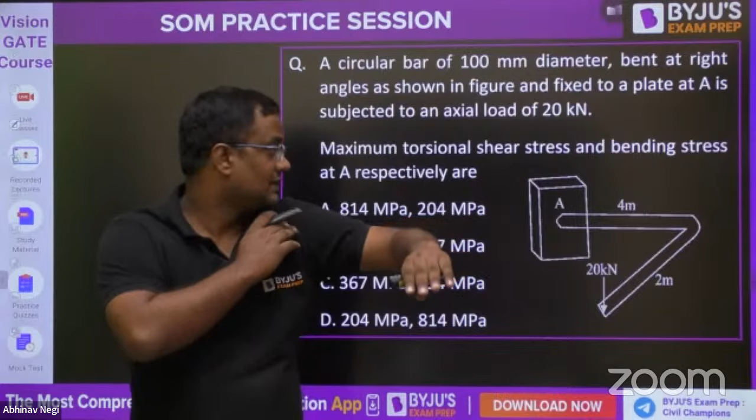Now here is the 20 kilonewton force. This is circular, and my hand is also circular. Here the 20 kilonewton force is coming. Then at my shoulder, this is also 90 degree. At my shoulder at the circumference there is point A. What will be at point A? The maximum shear stress and bending stress respectively.

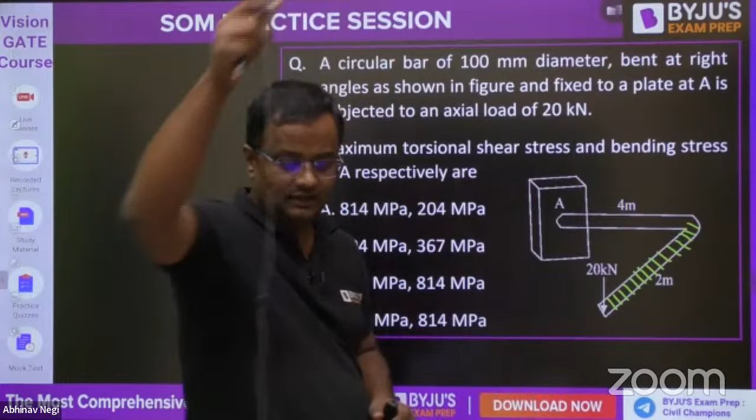Let me take this as green. Now let me make the free body diagram of this green. So this green is like this. And here in this green, 20 kilonewton forces are coming. Everything is in equilibrium. It is fixed here.

So equal and opposite reaction will be coming here. So here 20 kilonewton will come for balancing, so that summation Fy is equal to 0. This 20 is also providing moment, 20 into 2 equals 40. So that 40 opposite moment is also coming for balancing.

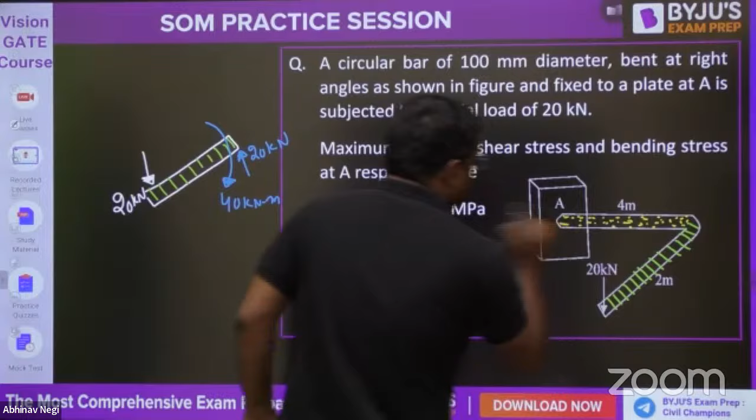Now let me make the free body diagram of this one, the yellow, dirty fellow. Internal forces are always equal in magnitude and opposite in direction.

So internal force here is upward, so here it will be downward, 20 kilonewton. And guys, if you see it in 3D, this moment which is like here, it will be about the longitudinal axis. About this axis, this moment is there, how much it is, 40 kilonewton meter.

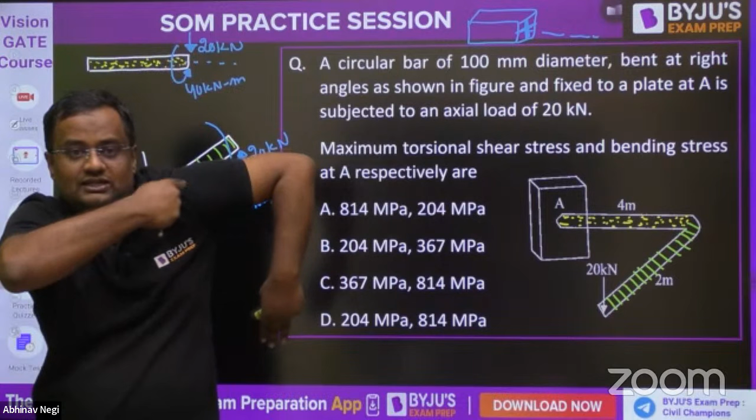Guys, bending moment and torque, both are moments. But suppose this is a beam, then about the transverse axis - these two axes passing from the section - the moment about these axes is the bending moment, and the moment about the longitudinal axis is torque. If somebody is applying load here and my hand is moving like this, that is a torque for this portion.

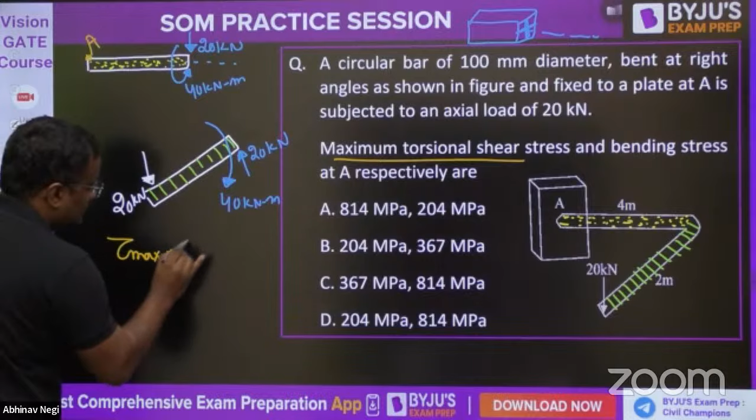And now here is somewhere point A. First of all, maximum shear stress is asked. So tau max for a solid circular section is 16T by pi d cube. This is T, T is 40 kilonewton meter. Diameter is also given, I'm not wasting time in calculation.

From here you will be getting 204 megapascal. Okay, this is providing torque.

Now bending stress is asked. So sigma is equal to M by I into y max. This load is providing moment here. What is the bending moment at point A? From 20 into, what is this distance, 4 meter, so 20 into 4, force into distance - this is not moment, this is torque, this is not torque, this is bending moment. So it is 80 kilonewton meter.

So it is 80 upon I, where I is pi by 64 d to the power 4, and y max is d by 2. I'm not wasting time in calculation, I have already done it. So that is the answer.

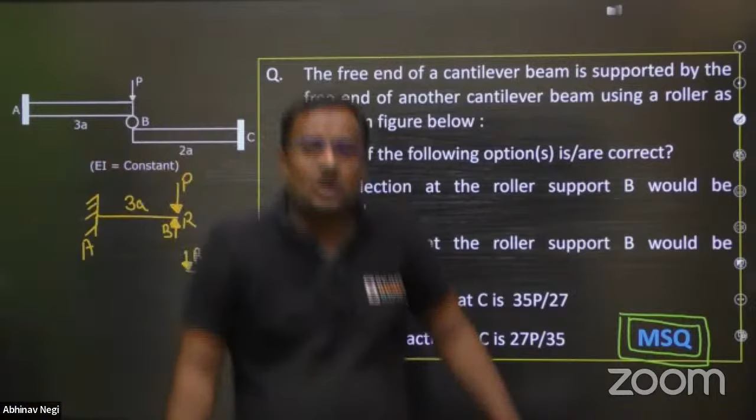This is A, this is B, this is C. If the reaction here is upward, then here the reaction will be downward. Guys, if I'm applying load downward on the floor, then the floor applies reaction upward to me, right? If I apply load downward, the reaction by the floor to me is upward, right?

So if that reaction goes down, guys, I don't know how many of you will be able to cope up with me or believe me. Whenever I want to draw a free body diagram, this I told in the paid class also.

The thing that I do is I assume that I am that part. So when I assume I am this part and somebody is applying a P load, from there an upward push will come to me like this. I assume that I am that part.

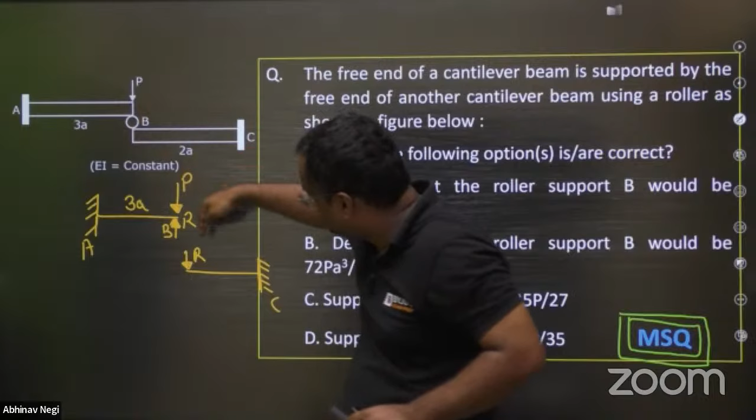Now suppose I am this other part, and from here load is coming. So if I am this, then due to this P load, whatever reaction comes, that comes to me downward like this. And they both are jointed.

They both are jointed. If this goes like this, the deflection of both hands are the same, right? Deflection of the right hand and the left hand both are same.

Not wasting time in calculations. R will be, from here, 27P by 35.

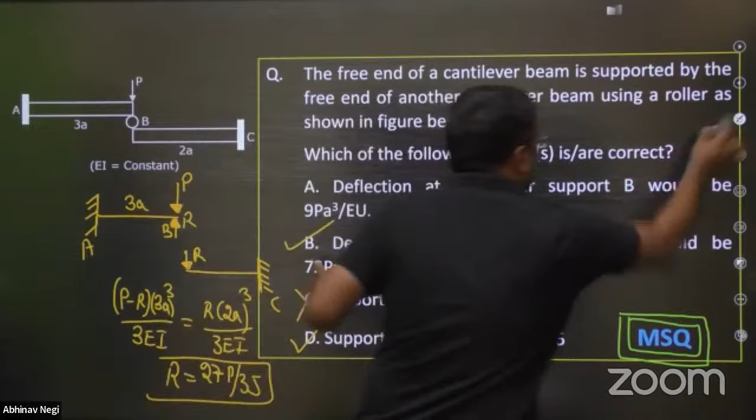27P by 35. So D is correct, that means C is wrong. D is correct, that means C is wrong. Understood?

Now moving further, what is asked? Deflection at the roller support B would be what? So either you put R here or R here, you will get the reaction. Deflection of roller support delta B.

Both are equal now, either you put here or here. Suppose I put R equal to 27P by 35, into 2A cube divided by 3EI. So from here, deflection at B is 72PA cube by 35EI, giving you the B answer.

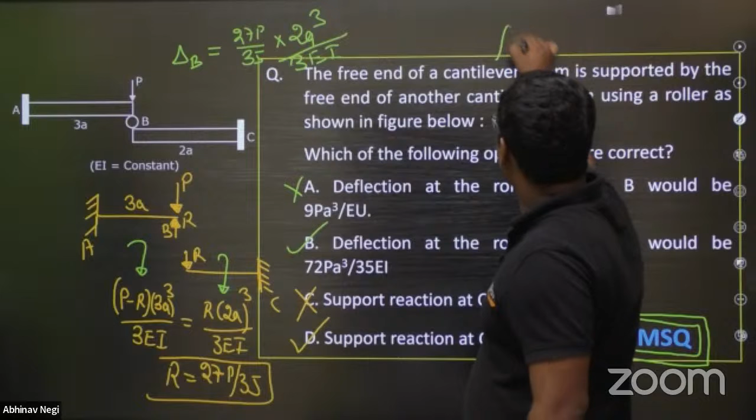So of course A will not be there. So the answer will be B comma D. Give me yes or no, have you understood this or not?

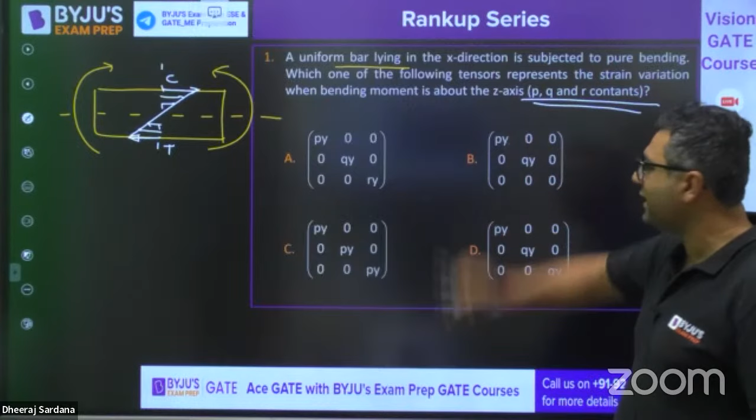So guys, this is a wonderful question, and this type of question we can expect in GATE examination for sure, for 2 marks. I feel everybody would be knowing this.

Vineet is saying the answer is C. Okay Vineet, what about others?

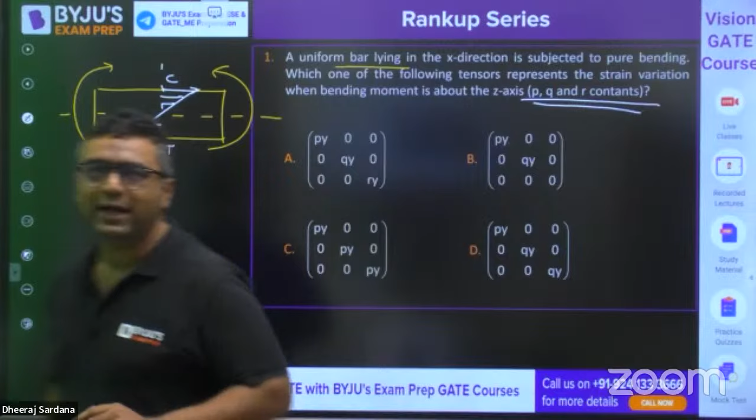Vineet has said the answer to be C, what about others? This is a wonderful question, I'm going to solve it right now in front of you. Raj is saying the answer to be B. Okay fine, so I'm going to start it now.

Everybody knows that in the derivation, we get the strain in the X direction as plus minus Y by R. This is the answer, and strain distribution is linear just like the stress distribution. Both are similar, because we are assuming Hooke's law to be valid. With those assumptions, stress and strain are directly proportional to Y to the power 1, so we get a linear expression for sure.

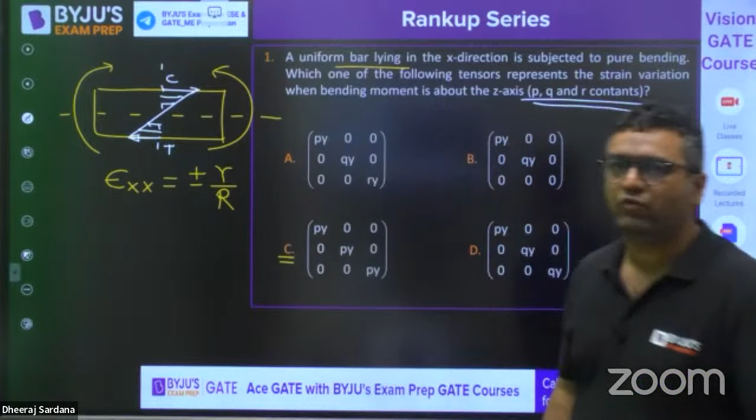So this is epsilon xx. You know that whenever finding the strain in the lateral direction, whether YY or ZZ, for uniaxial loading it is minus mu times epsilon xx. So this is Y by R, let us say this value is P into Y, where 1 by R can be assumed as P. So I will put here P into Y.

Obviously mu into P cannot be P, it will be something else, let us say Q, so we write it as Q into Y. Forget about plus minus right now, that will also be considered. But if you see this option, here all the strains are unequal, but YY and ZZ should be equal, so that's why A is wrong.

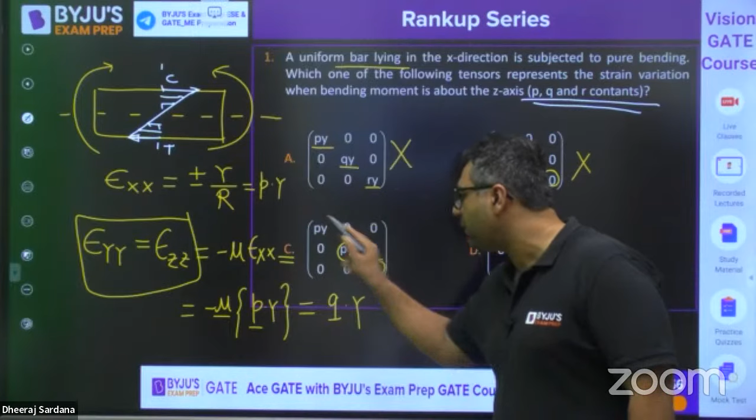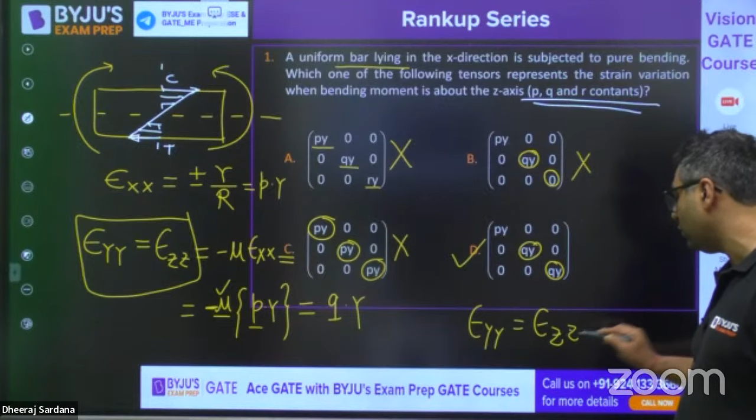In option B, YY and ZZ are not equal, so this is wrong. In another option, YY and ZZ are equal, but epsilon xx, epsilon YY, epsilon ZZ are all equal, which is not possible because mu is never 1, and also this minus sign is there, so this is also wrong. So only the option where this value and this value are equal is correct, because epsilon YY equals epsilon ZZ for uniaxial loading, and epsilon xx will be different from epsilon YY and epsilon ZZ.

So the answer will be D for this. I hope everybody understood this, this was a wonderful question. Vineet, I understood, TPM I feel you got your mistake, the answer for this is going to be D.

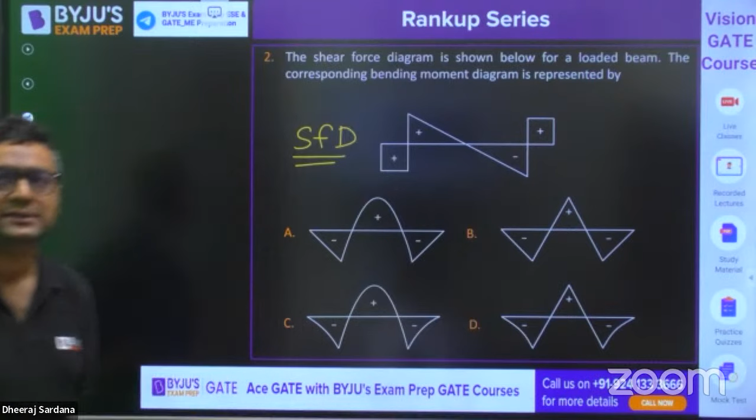Yes, TPM, Vineet, Factorial 0. Everybody, Rahul, Sumit, please tell me what is the right answer. Okay Raj, very good, Raj is saying A. What about others?

We already know one thing, that there is something called load intensity. Then we have shear force, then we have bending moment. We know that if this is x to the power n, this is x to the power n plus 1, this is x to the power n plus 2. So always the power is getting increased.

Here, my dear, if you see the shear force diagram between this and this point, it is an inclined line which is like y equals mx plus c. So you can see the equation has x to the power 1. Why am I going in this way? Because even a student who did not study SFD BMD can understand this. That's why I'm going with very basic ideas.

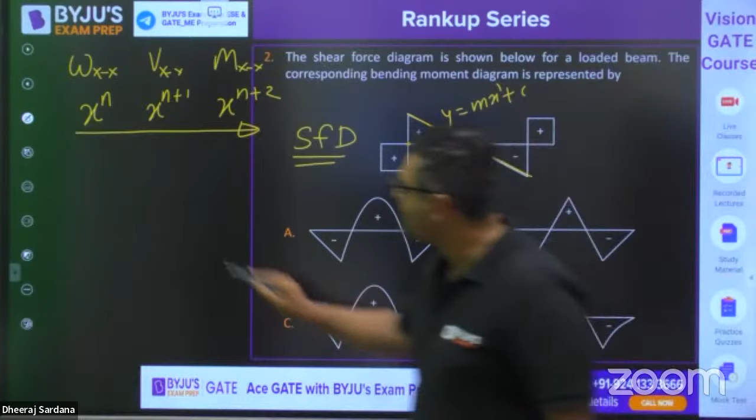So this is a linear curve. If this is linear, it means the shear force diagram is x to the power 1, so the bending moment should be x to the power 2, which should be a parabola. So you can see in this option, it is not a parabola, it is a straight line. So B and D are going to be wrong options. Now we have two options available, A and C, where we have these parabolas.

With the same idea, this is a straight line with y equals constant, meaning x to the power 0. So my dear, if shear force is x to the power 0, it should be x to the power 1. So we must have here a line with y equals mx plus c type, which is available here. But here we have a parabola, so that is wrong, and this is going to be the correct answer.

This is how we do SFD BMD types of questions. Very good, very good, very good. Wonderful guys, so the answer will be A for this.

Moving to the next question, guys. In question number 3, this is given as the shear force diagram, and they are asking which of these 3 loading diagrams can have this SFD. So tell me the right answer. Options are 3 only, 1 and 2, 2 and 3, or 1 and 3. I am waiting for the answers.

Tell me, Vineet, TPM, Raj, Factorial 0, Ajit, Krishna Mohan. Okay, Krishna Mohan is saying the answer is A. Vineet, okay you are saying 3 only. Okay, Raj is saying D, 1 and 3.

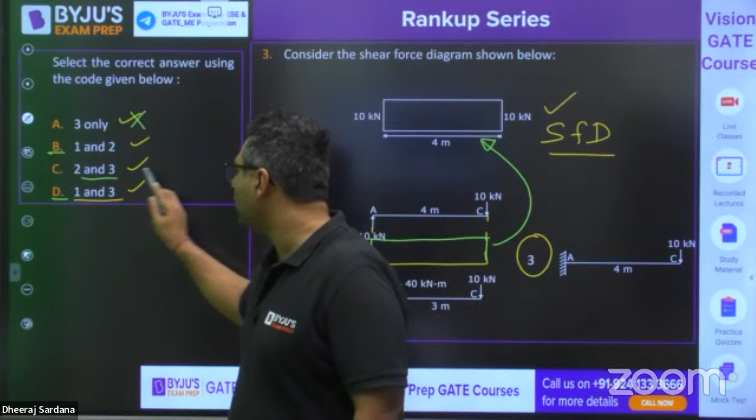It is for sure that 3 only cannot be correct because the first one is correct and here 1 is not there, so it is also wrong. So either B or D will be the right answer.

Now if you see this, everybody knows this is a cantilever beam. When you take a section, this will be the diagram. Also, here we have a support reaction. So you can see this and this are the same, only here they have shown support, here they have directly shown the reaction. Yes, they have not shown the bending moment reaction, but that is not required for SFD.

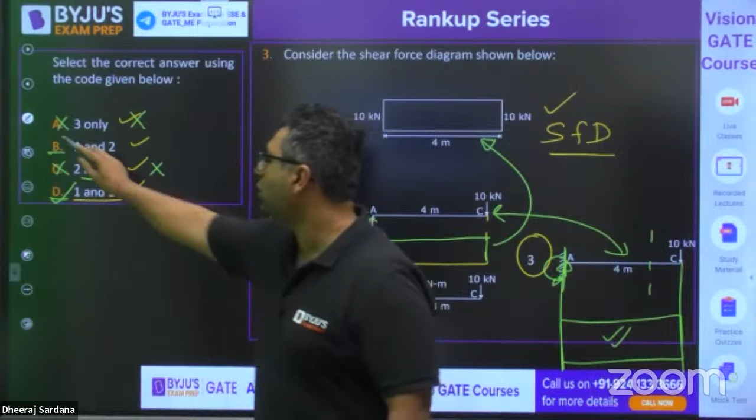So my dear, that is why that is also going to be correct. So the answer is D, not C, not A, not B. So D is the right answer. Very good guys, TPM, Vineet, very good, Factorial 0.

Moving to the 4th question. After this, 4 more questions, so you can see we are covering all types of questions. This question is from bending stress. Very good Vineet, very good Ajit, this is from bending stresses.

Consider the cantilever loaded as shown in the figure. This is the UDL which is acting on this beam, and they are asking what is the ratio of the maximum compressive to maximum tensile stress. It is a very easy question, and without going for much calculation, you can answer it.

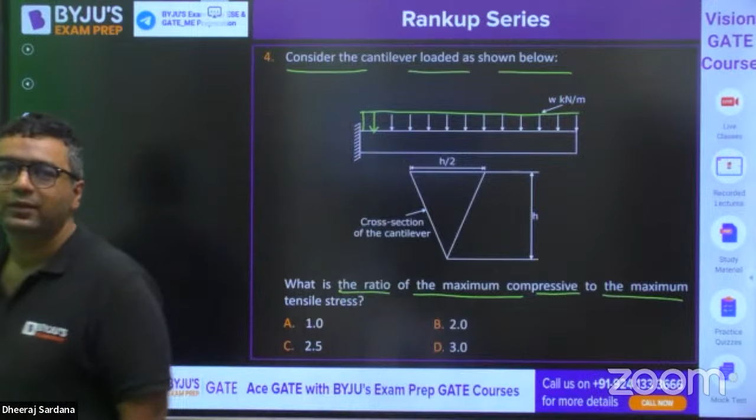Let us see how many of you smartly use the concept of bending. Smart people would give an answer quickly, while hard-working people will calculate and give the answer in 1 minute.

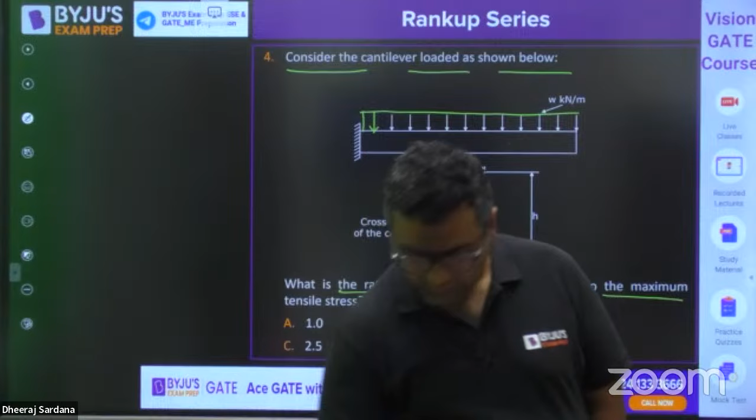Vineet, Ajit, TPM, Raj, Factorial 0, Sayyid answering. Sayyid said the answer is A. What about others? TPM is saying 1.5. What about Vineet, Ajit and Raj? TPM, tell me the answer, I am waiting.

Is it so difficult? You know what is the formula for the maximum bending stress? Maximum bending stress is given as M upon Z, where Z is the section modulus.

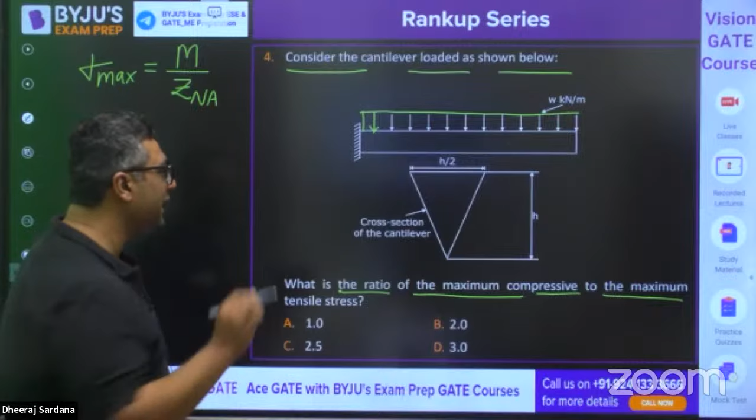If you see the cantilever beam, obviously the maximum bending moment we will be getting at this fixed support. So when we talk about this, here maximum bending moment will be there. We need not actually find the value, we are going to answer about tensile and compressive stress.

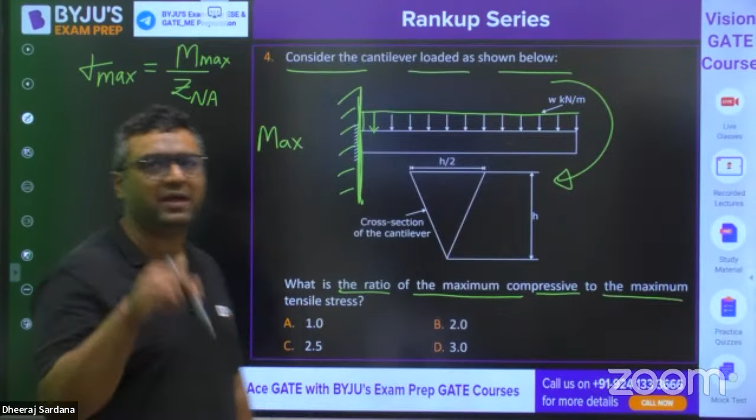Because the loading is of hogging nature, top fibers will be having tension, bottom fiber will be having compression. So you would be writing sigma tensile maximum by sigma compressive maximum.

You also know that sigma is written as My upon I, where M and I for a section are constant. So we just need to put the value of Y, and as we are looking for maximum stress, we look for maximum Y. For a triangle, the neutral axis will be H by 3 from here and 2H by 3 from here. So sigma is directly proportional to Y max.

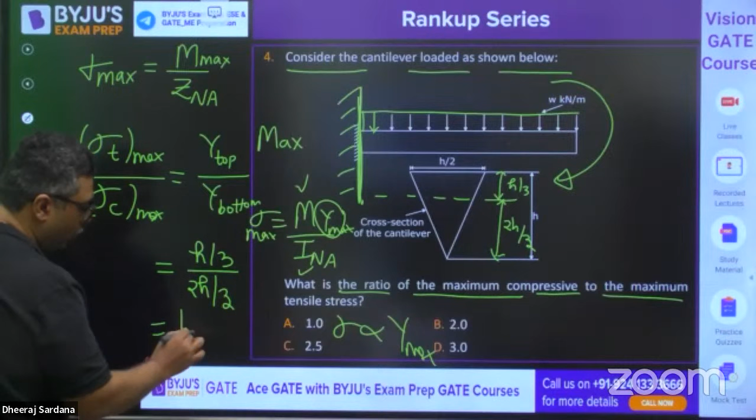We just need to put it: sigma T max by sigma C max. Tensile is coming on the top fiber, so it is going to be Y top divided by Y bottom. You just need to put the Y of top fiber and Y of bottom fiber. For top fiber it is H by 3, for bottom fiber it is 2H by 3. So the answer will be 1 by 2 or 2 by 1, depending on whether you write for top and bottom or bottom and top.

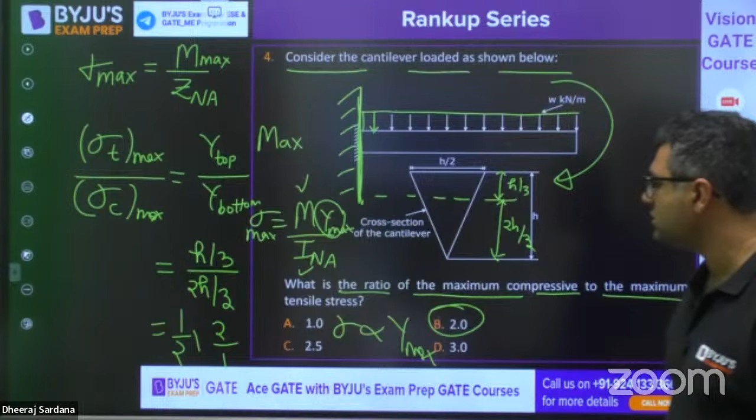If you see the options, only one option is matching with that. B is the correct answer. Factorial 0, TPM, Vineet, Sayyad, Ajit, everyone, B is the correct answer. Raj, are you getting it or not? So B would be the right answer, guys, and I'm happy to see your response. Very good, guys, 4 questions are over from my side.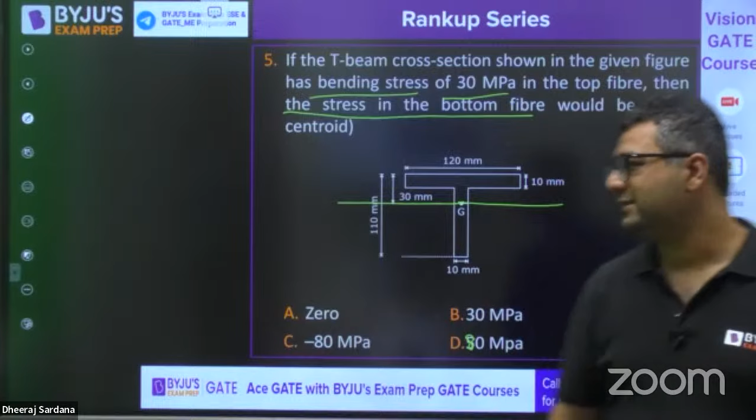Tell me, and do like and share the session, guys. TPM said minus 80. It would be a wonderful question if this option is plus 80. So TPM is saying minus 80, what about others, C or D? By now everyone must have an idea that the answer is either C or D. So tell me, C or D? Manoranjan is saying C.

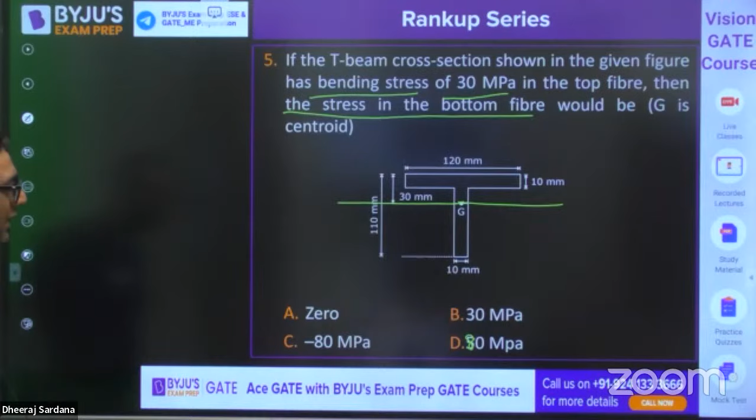Sukeshani is saying D. So dear, you know that sigma is directly proportional to Y, that is for sure. We have just seen. And they are saying the bottom fiber, top fiber they have given. So sigma top by sigma bottom will be Y top by Y bottom.

Y is the distance from the neutral fiber or neutral axis. So they have given this is the neutral axis passing from centroid. So this distance is 30, this distance will be 80. So you can write it as 30 by 80.

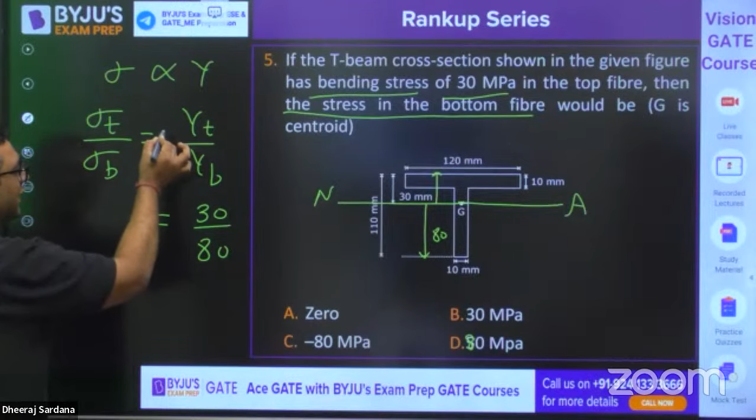Actually, if you see the right connection, here minus sign is coming if you are going for the ratio. But we are not writing minus sign as we are already knowing about the directions. So sigma tensile by sigma, sigma top by sigma bottom. From here, sigma bottom will be coming 80 magnitude.

Now you need to see the nature, whether it is tensile or compressive. So you know that this is the top fiber, this is the bottom fiber. And you can see they have mentioned that top fiber is having 30 MPa. So my dear, if top fiber is having the 30 MPa, you need to tell the bottom fiber. So if here it is positive, here it must be negative. So answer is minus 80. C would be the right answer.

Papa ka ghoda is also there. Late ho gaye aaj aap. Good evening. Let's move to the next question.

Question number 6, from the Mohr circle. So you know every variety we are covering. We have seen 2 questions from bending. Sir has already told you 1 question from all the types of stresses like normal, shear, bending. Then we have seen 2 questions on SFD, BMD. This is from Mohr circle.

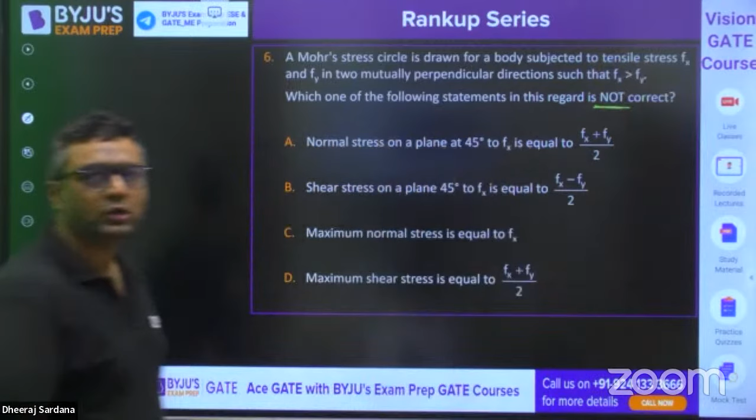So the question is, a Mohr circle is drawn for a body subjected to a tensile stress Fx, Fy, mutually perpendicular. Fx is more than Fy. Which of the following statement in this regard is not correct? Sayyad, Vinay, very good. What would be the answer?

Normal stress on plane 45 degree to Fx is equals to. Shear stress on a plane 45 degree to Fx is equals to. Maximum normal stress is equals to. Then maximum shear stress is equals to. Out of these 4, which one is not correct?

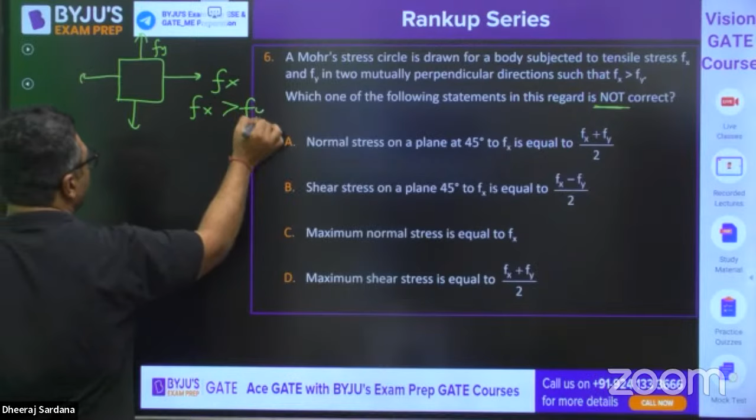So you know they have given us stress like this, Fx and Fy, and they said Fx more than Fy. So when you will be plotting the Mohr circle for this case, this will be the Mohr circle. This is Fx, Fy. And this is going to be the center, which is Fx plus Fy by 2. And this will be the radius. And you must be aware, here we have normal stress, here we have shear stress. So tell me what would be the answer.

They are asking which of the following statement is not correct. So my dear, first of all, normal stress on a plane at 45 degree to the Fx. If a plane is making 45 degree to the plane of Fx, Fx is X face. And you know the state of stress on X face is denoted here, that is Fx, 0. And the state of stress on the Y face is denoted here, that is Fy, 0.

So they are saying for 45 degree, in Mohr circle, angle is double. So we will be going to the 90 degree. So what is the normal stress on this? What is the coordinate of X here? Fx plus Fy by 2. So you can see Fx plus Fy by 2. It means this is correct.

They are asking which is not correct. Shear stress on a plane 45 degree. Shear stress, you know, this radius is. So what is the radius for this? Obviously, radius is going to be Fx minus Fy by 2 because diameter is Fx minus Fy. So obviously, Fx minus Fy by 2 is radius, that is shear stress. Because you know tau max is nothing but the radius of Mohr circle. So that is also correct.

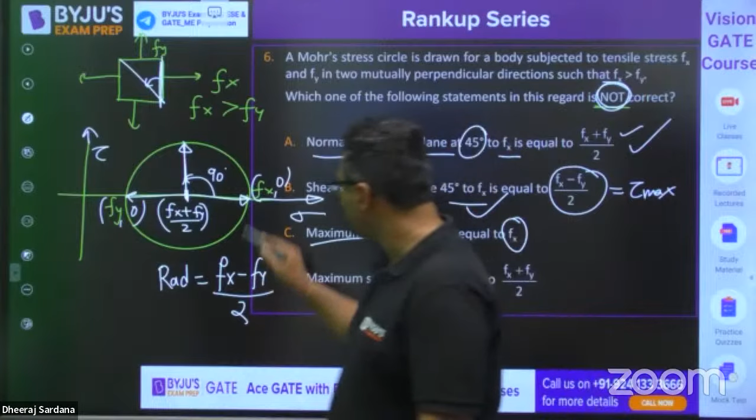Then maximum normal stress is Fx. Yes, it is, because this is the principal stress sigma 1. This is the principal stress sigma 2. Because 2 extreme points of the Mohr circle where it cuts on the x-axis are giving you the principal planes. So that is why this is also correct.

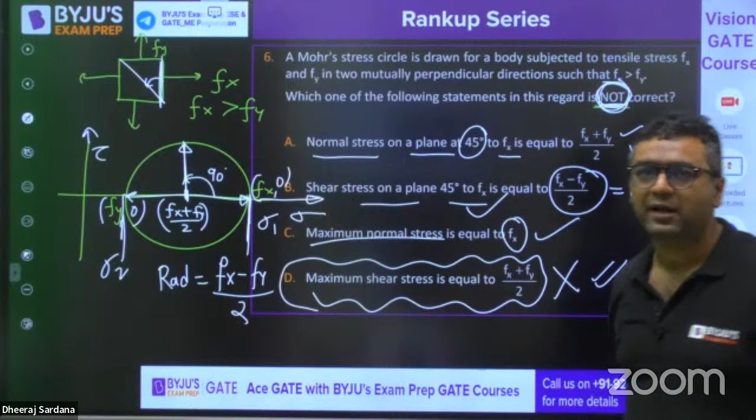So this is wrong because maximum shear stress is not equals to Fx plus Fy by 2. So that is why, my dear, this is the wrong statement. So this is going to be the answer. If NOT is not there, it will be MSQ and A, B, C would be correct. Very good, Sayyad, Vinay, Raj, Vineet.

Yes Vineet, that you can say, but as I said, I am telling for a student who may not be aware of all the properties of Mohr circle. A general student who just knows the basic idea of it.

A solid shaft of diameter d is replaced by a hollow shaft of the same material and length. The outside diameter of the hollow shaft is 2d by root 3, while the inside is d by root 3. What is the ratio of torsional stiffness?

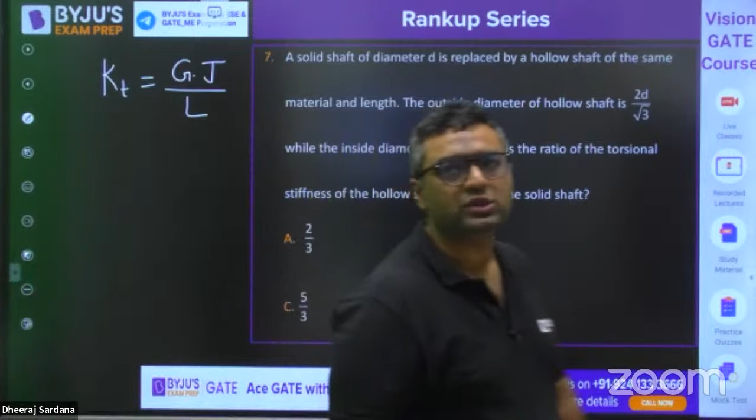You must be aware of that. Torsional stiffness is given as GJ by L. So my dear, they have said the same material and same length, so if you need to find out something, that is the ratio of J.

So they are saying the ratio of torsional stiffness of hollow to solid. Kt for hollow, Kt for solid, J of hollow, J of solid, because L and G are same. J of hollow is going to be pi by 32 times d naught to the power 4 minus di to the power 4. And J of solid is pi by 32 d to the power 4.

So d4 will get cancelled out. You just need to put the other values and get the answer. Wonderful guys, so solve this question.

Question number 7 from my side. After that, last one question is left from my side. Solve it guys, solve it, solve it. Options are 2 by 3, 3 by 5, 5 by 3 or 2. What would be the answer?

Okay, so everybody is saying the answer to be D. So when you will be putting these values, this is 2d by root 3. What will be the square of 2 by root 3? It will be 4 by 3. And once again, square will be 16 by 9.

So I feel when you will be solving this ratio, hollow by solid, what you will be getting, d to the power 4 will get cancelled out, pi by 32 will also be cancelled out. So you would be getting here, it is 2 to the power 4. 4 into 4 is 16. 16 by 9 minus 1 by 9 divided by 1. Yes or no? So I feel you would be getting 15 by 9.

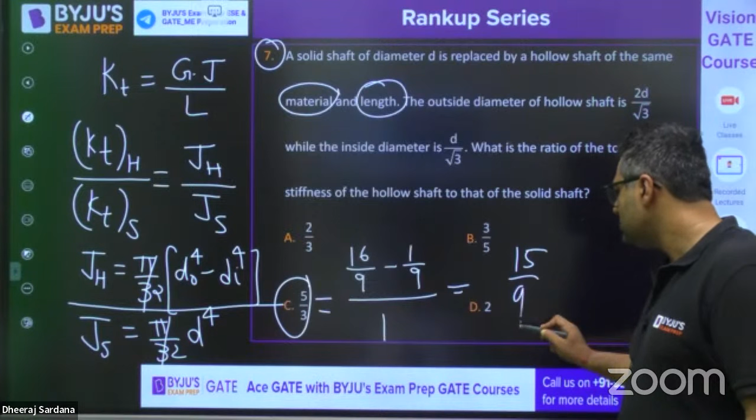Manoranjan, 16 by 9 minus 1 by 9 will be 15 by 9. So dividing by 3, it becomes 5 by 3. Answer is 5 by 3. Yes, got your mistake, C will come definitely. You didn't consider the square. C will come. Wonderful Sayyad, very good.

Moving to the last question guys, moving to the last question. This is from simple stresses and strain. So we have covered nearly all the topics. This is a famous question, you can get it directly in the exam.

This is for a taper bar. They are saying a tension bar is found to taper uniformly from a diameter d minus a to d plus a. So here diameter is d minus a, here diameter is d plus a. If mean diameter is used for calculation of Young's modulus, the percentage error involved is.

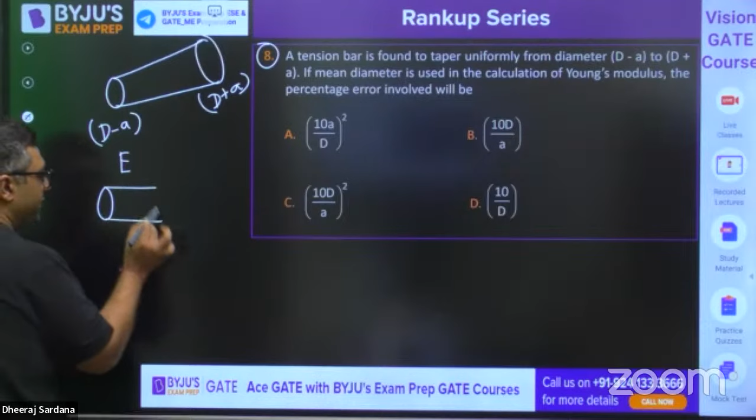So they are finding out the Young's modulus. You know that whenever we have the prismatic bar, then delta is coming out to be 4PL upon pi E D1 D2. And whenever we have a taper bar, delta is coming out to be 4PL pi E. I have written it opposite, I feel.

This is D square, this is D1 D2. Okay, so my dear, whenever you will be going for calculation, this is for prismatic, this is for taper.

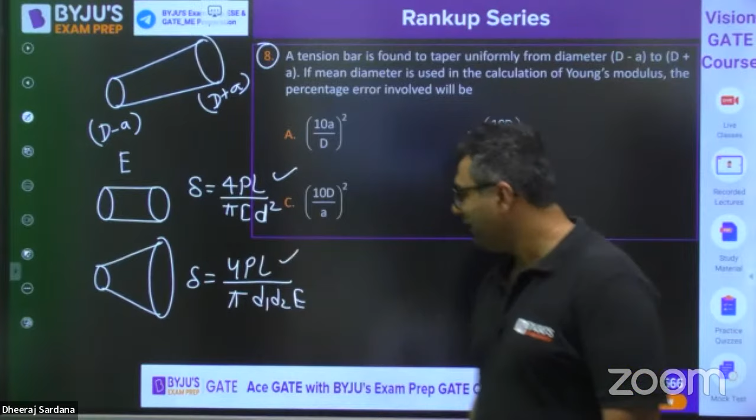Real bar is taper, but they are calculating the things assuming it to be prismatic, so there will be some error. And they are asking for the percentage error. So you can write delta actual minus delta theoretical by delta actual into 100.

So you would be writing 4PL pi E D1 D2 minus 4PL pi E. They have taken this as prismatic bar. For this, D will be D average. What is average? It is D minus A plus D plus A divided by 2, so you will be getting D only. So it is nothing but 4PL pi E D square.

I have made it very easy for you now. Just solve it and get the answer.

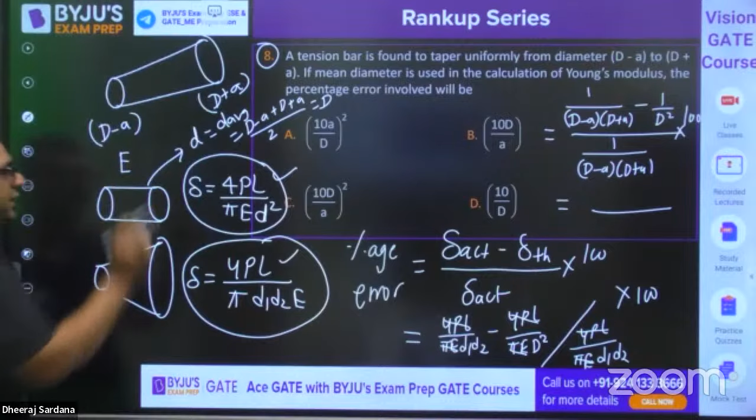This question is of gate level. Maybe it came once in ESE, but it can repeat in gate. Some questions are good, we can feel it can come in gate and ESE both. TPM is saying the answer is A, and I feel 10A by D whole square will be the right answer. Vineet, Papa Ka Goda, Raj - everybody has seen that?

So guys, 2 questions I have already done, this and this MSQ. Let us move to the next question, guys. Beautiful question, guys, one of my favorite questions in strength of materials.

There is a circular cross section of a beam. In that circular cross section, 2 things are there: one is V shear force and one is green torque. Yellow shear force V and green torque T. Now there are 4 points: 1, 2, 3, 4. That beam has a circular cross section and is subjected to a shear force and a green torque. At what point will the maximum shear stress be acting?

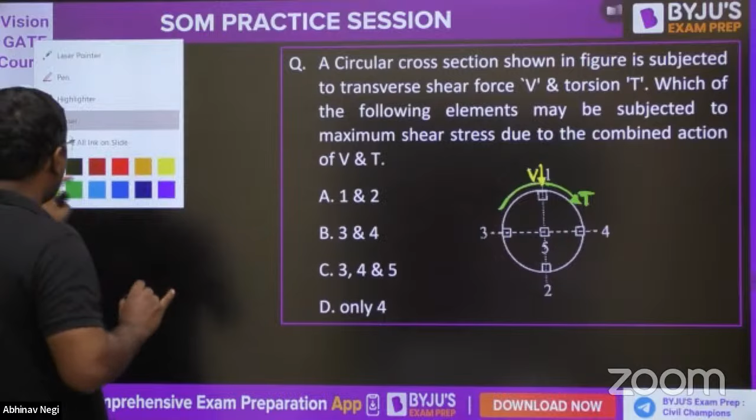Let me make it more reasonable. Due to shear force V, the shear stress formula is tau equals SAY bar upon IB. So it will be like this: 0 at top and bottom, and maximum at neutral axis. This is 4 by 3 tau average. The direction will be downward because V is downward. Correct. And due to green torque...

If I represent the shear stress by torsional formula, it will be like this. That will be at point 4 and that will be at point 3. From 4 it is going downward, and torque is like this - from 4 it is going downward and from 3 it is again coming upward. So 4 is downward and 3 is upward.

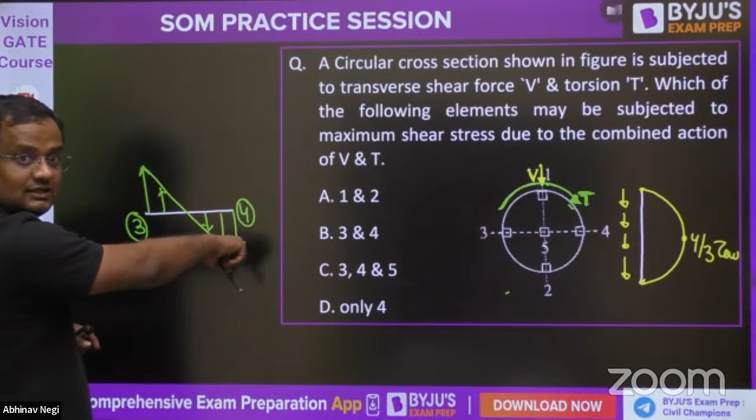Now if I make it for 1, this is linear variation by torsional formula. For 1 and 2: at 1 it is going like this, tangential, and at 2 it is coming like this. So guys, the maximum will not be at 1 and 2, because at 1 and 2, yes torsion is maximum, but due to this, V shear force is 0. So 1 and 2 will be ruled out.

1 will be out and 2 will be out because the yellow one is 0. Now 3 and 4, guys, due to shear force it is also maximum and due to torque also it is maximum. But at point 4, due to shear force it is downward and due to torque also it is downward. But at point 3, due to shear force it is downward, but due to torque it is upward, so they are cancelling each other. So maximum shear will be at point 4.

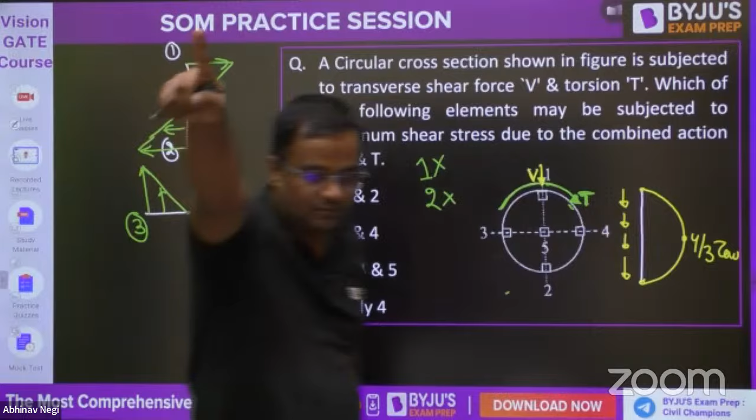Give me yes or no in the comment box. Have you understood this or not? Have you understood this beautiful question? Yes or not guys? Excellent. Any doubt you can ask me. Yes TPM, yes Papa, Rajas.

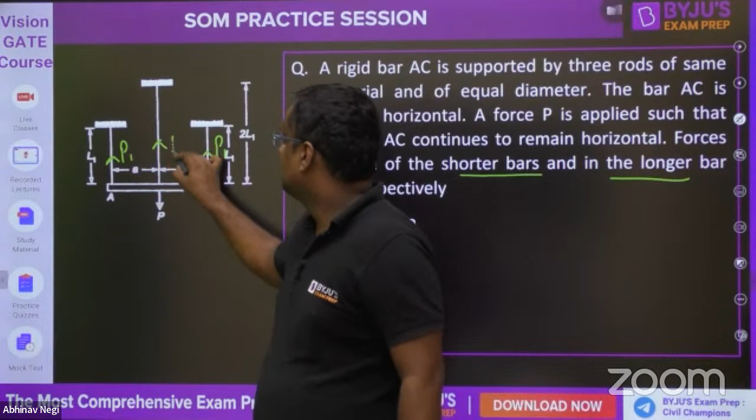Nice names. Now this is A, symmetrical. Length is L1 and that length is 2L1. What are the forces in shorter bars and longer bars? Let the force in the shorter bar be P1. Due to symmetry, this will also be P1 because moment at that point will be 0. So P1 into A and P1 into A has to be balanced. And here it is P2, here it is P2. The deflection has to be same because it is still horizontal.

It is going here, so deflection in both will be same. Now one equation will be: P downward equals upward forces 2P1 plus P2. That's one equation. And delta of this will be same: P1 into L1 upon AE equals P2 into 2L1 by AE. Let me check - A and E both are same, na? The rigid bar is supported by 3 rods of equal diameter and material, so AE will be same. So from here L1 will cancel. P1 is equal to 2P2.

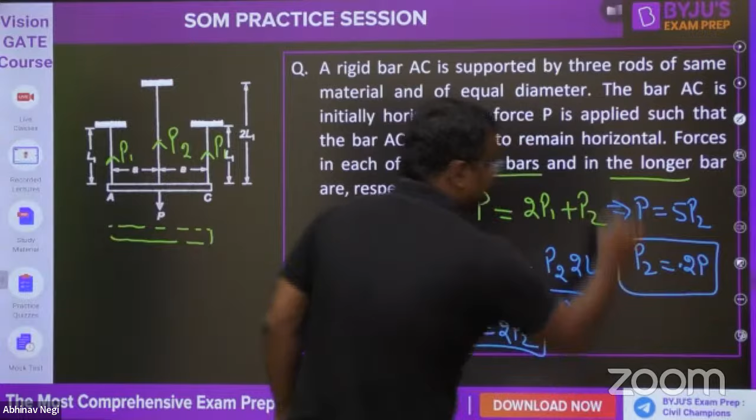P1 is equal to 2P2. So 2 into 2P2 is 4P2, plus P2 is 5P2. So P is equal to 5P2, meaning P2 is equal to P by 5, which is 0.2P. So P2 is 0.2P, and P1 is 0.4P. So in shorter bars, it is 0.4P, and in longer bars, it is 0.2P. Option number A. Have you understood?

Have you understood? Any doubt you can ask me, guys. Any doubt you can ask me?

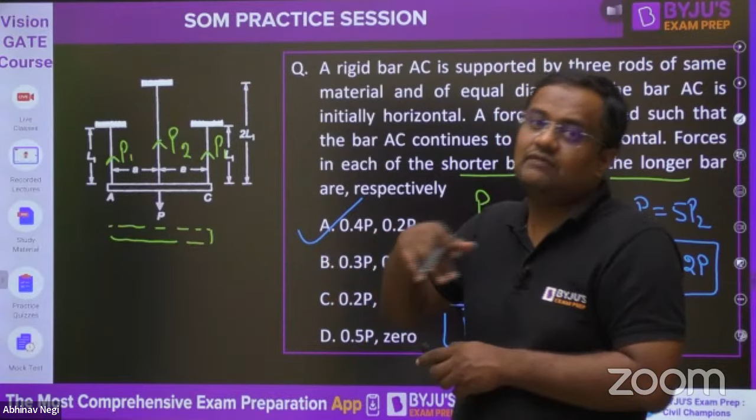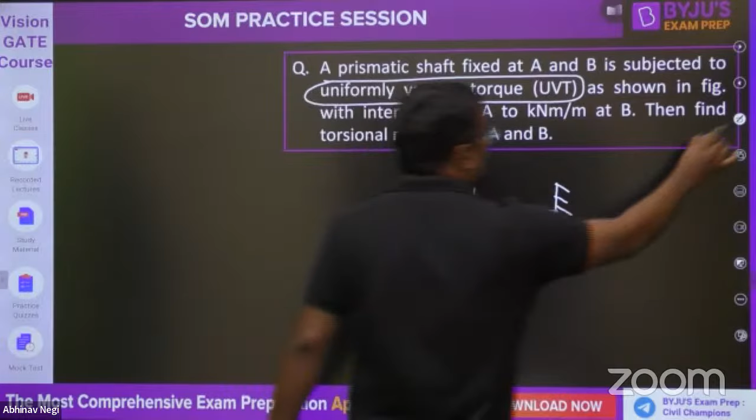Now, this is again a beautiful question, guys. Uniformly varying torque. Guys, you might have listened about UDL, uniform distributed load, UVL. Might be UDM, uniformly distributed moment also. Now I'm going one step forward: uniformly varying torque, not UDT, uniformly distributed torque. Uniformly varying torque, I'm going one step forward. With intensity, this is A, this is B.

The torque is like this now: 0 at A and T naught here, T naught kilonewton meter per meter at B. Then what are the reactions at A and B? A and B are fixed supports, so they will be providing reactions. So what are the reactions?

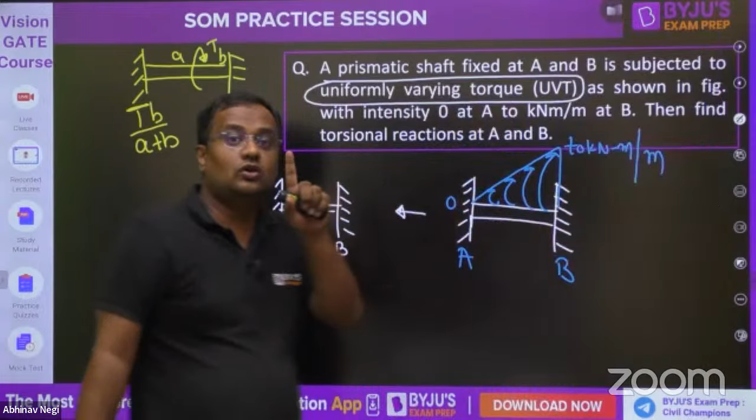This is A, this is B, and the total torque, like the total load, is the area under the loading curve. The total load in UDL or UVL is the area under the loading diagram, whether it is UDL, UVL, parabolic load, or sine load, anything. Similarly, the total torque is the area under the torque diagram. So this length is L, so the total is half base into height. So T naught L by 2, that will be acting at the center of mass. Center of mass from here, the shorter side, it will be 2L by 3, and here it will be L by 3.

Now applying this indeterminate bar formula, this reaction is T into B upon A plus B, and this reaction is T into A upon A plus B. Same thing happened in this also: this is P, this is A, this is B. So this is PB upon A plus B, and this is PA upon A plus B.

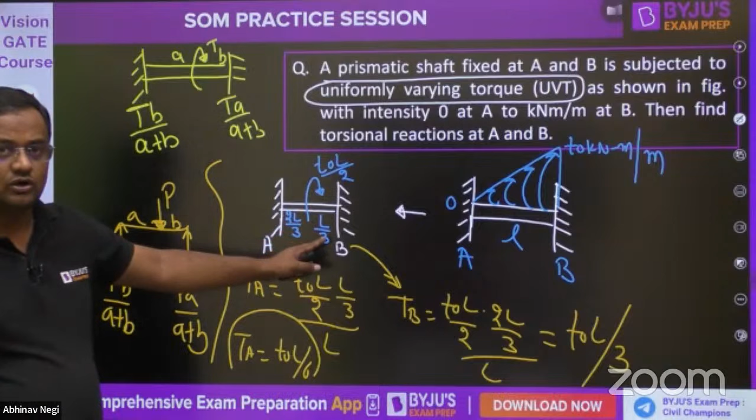Same here as well. So torque at A is equal to T naught into L by 2 into that distance L by 3 upon total L. So TA is equal to T naught L by 6, and the TB is equal to T naught L by 2 into this distance 2L by 3 by L. So TB is equal to 2 cancel, T naught L by 3. Of course, this is T naught L by 6, this is T naught L by 3. More torque is towards the right hand side, so their reaction is also bigger.

Now guys, I am giving you an assignment. You can ask me in my Telegram group. You ask me in Telegram, I'll make the solution by my hand and send the photo. What is the assignment I am giving you in this question? We have to find the reaction, like you have seen SFD, like you have seen BMD, I have drawn AFD also. Draw the torsional moment diagram for this.

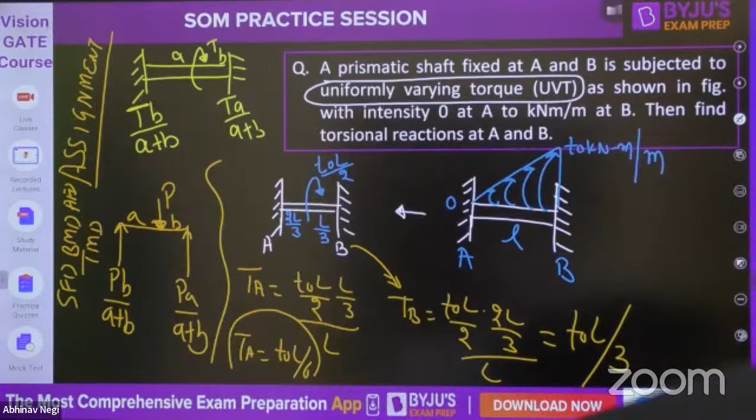Leave the assignment, let us make it ourselves here. I am making the torsional moment diagram, like you have seen SFD, BMD, we have made, na.

Draw TMD. Torsional moment diagram. Like you have listened to SFD, BMD, axial force diagram, here it is torsional moment diagram.

What is torsional moment diagram? If someone is asking, what is shear force diagram? Representing shear force at various locations. What is BMD? Representing bending moment at various locations. What is AFD? Representing axial force at various locations in a bar. So what is torsional moment diagram? Representing torque at various sections in a shaft.

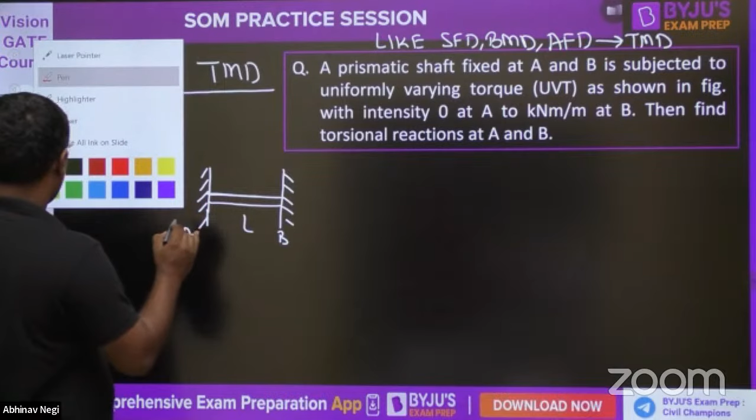So this length is L and torque varies like this, here it is 0 and here it is T0 kilonewton meter per meter. This reaction was coming how much? T0 L by 6, that is capital, and let me write it small also: T0 L by 6, and here it is T0 L by 3.

Similarly like SFD, BMD, AFD, suppose at X distance from here, at this section XX, I want to write torque at XX section. So one torque is like this. From right hand thumb rule, curl the fingers, it is towards inside, that is positive. Plus T0 L by 6.

Now curl the right hand thumb rule around this blue one. This is going outside, so this is minus. So at this section, what is the height of torque here? T0 changes in L length. So in one length the change is T0 by L, so in X length, the change is T0 by L into X.

Total change is from 0 to T0, in how much length? L length. So in 1 unit, the change is T0 by L, so in X length it is T0 X by L. So what is shear force? Summation from left or right? What is bending moment? Summation of moment from left or right. So what is torque? Summation of torques from left or right.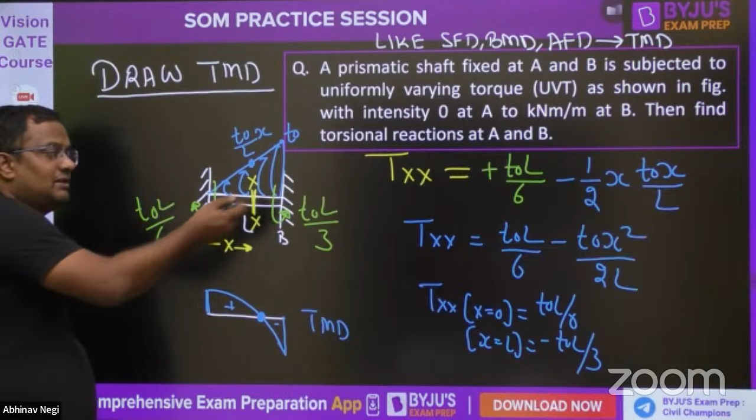So when you draw this, here it is T0 L by 6, there it is T0 L by 3, like this. This is the torsional moment diagram. Please check whether it is like this or this, you can find out this value. If this is more than at X equal to L by 2, it will look different, otherwise it will be like this. Also from double differentiation we can check the concavity and convexity.

Give me yes or no. Have you understood?

Okay, torsional moment diagram, now moving forward. This question asks the bending moment at E. What is the bending moment at E?

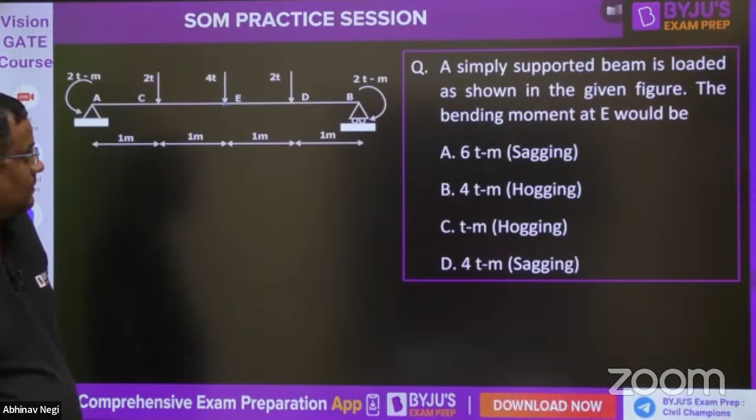This sir has done many questions. So let me go here.

The maximum tensile stress in the beam would be asked, but first of all make the BMD for this. This is figure 1 and this is figure 2, the cross section. I is given, loading is given, tensile stress is asked.

First of all, the bending moment diagram will be like this, please check. This will be 0.9 kilonewton meter, by symmetry this is also 0.9 kilonewton meter. This is hogging, so hogging means tensile is at top.

So maximum tensile stress is asked. Sigma max is equal to M by I into Y max. So M is 0.9, units you can change yourself. I is given as 3 into 10 power 6, change everything into SI units, answer also you'll get in SI unit. So M by I into Y max, now in tension Y max is this, on the top side, that is 70. Use proper units and you get the answer.

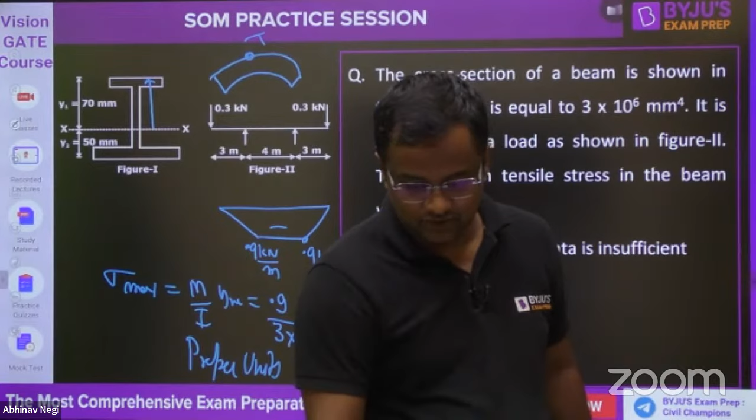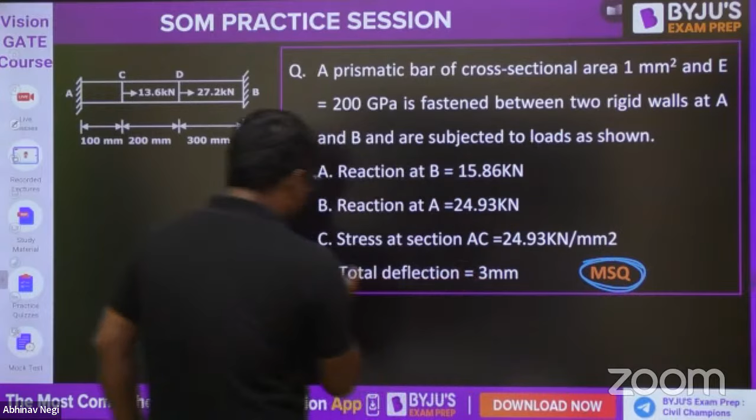Now this is again an MSQ, and from this MSQ first of all this is totally wrong because total deflection has to be 0, A and B are fixed, so total deflection has to be 0.

Total deflection has to be 0. Now reaction, any side you can take. If my answer is coming negative, my reactions will be wrong. Let the reactions be RA and RB.

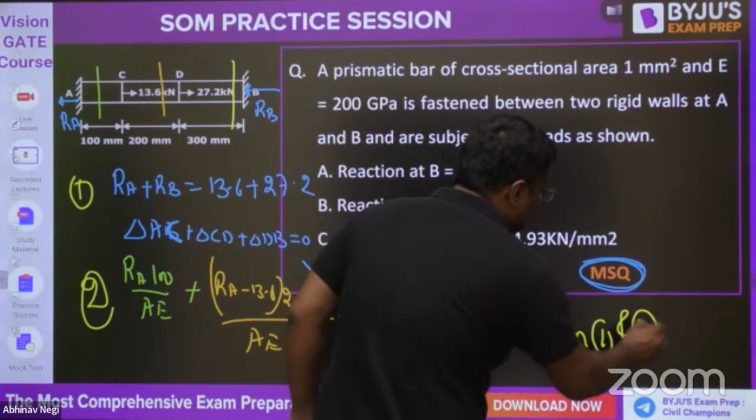Cut a section here. See from right, RB coming inside, so length is 300 by AE is equal to 0. So there are two equations, 1 and 2. From 1 and 2, find RA and RB, whatever values you are getting.

Okay, find RA and RB, and stress at AC region. Stress at AC is equal to RA upon area. And area is given: area is 1 mm square.

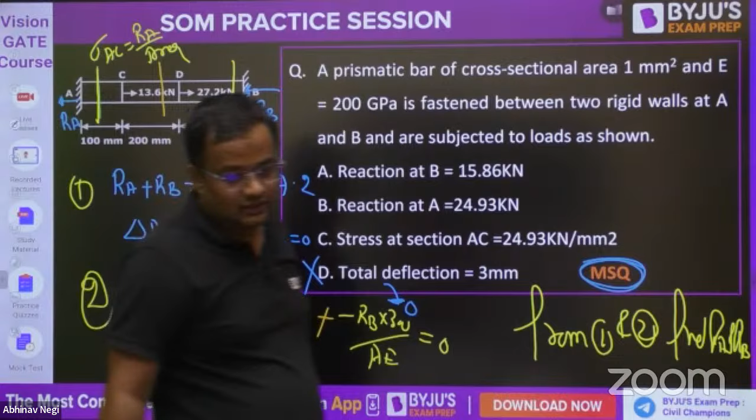Can you do it now? Please tell me, guys. I'm not solving because concept is more important. Have you understood? Any doubt?

Excellent, guys, excellent. Now this question.

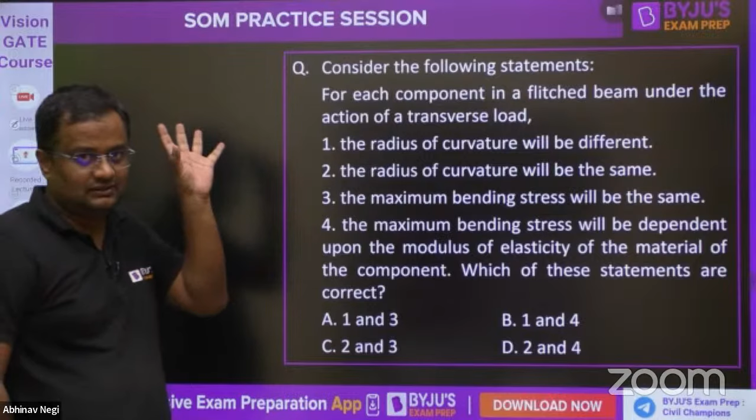Consider the following components. What is a flitched beam? A composite beam of metal and wood, generally that metal is steel, is under the action of transverse load.

Statements are written: the radius of curvature will be different. Guys, composite means though both beams are acting together, so when the load is applied, both beams will be acting together. So it will not be like this, that one part is like this and the other part is like this. Both are jointed, so radius of curvature will be same.

Now the maximum bending stress will be, guys, related to strain. Suppose this is steel and in between this is wood. Now the strain diagram is always linear, from the assumption that plane section remains plane after bending - plane section before bending remains plane after bending.

Now when I'm making the stress diagram, in steel the stress will be more because Young's modulus is more, and in wood the stress will be lesser. Here the strain is epsilon. So in wood, the stress sigma wood will be strain into Young's modulus of wood. Stress in steel will be strain into Young's modulus of steel.

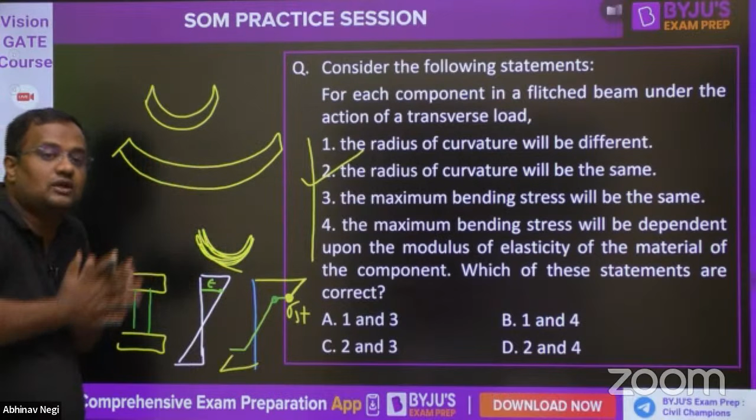Young's modulus of steel is around 10 to 20 times more than that of wood, so it will be more. So the maximum bending stress will depend upon the modulus of elasticity of the material. So statements 2 and 4 are correct, that is option D. Understood?